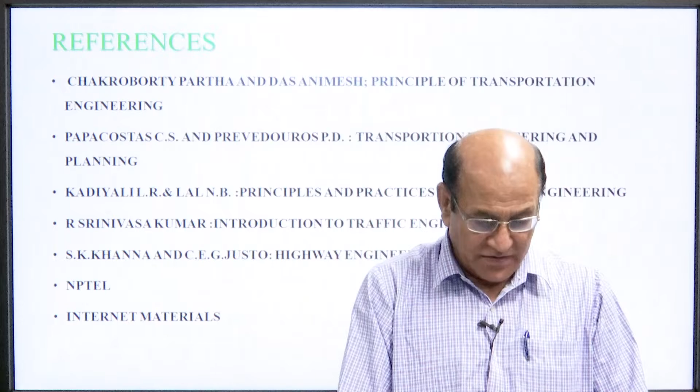References that we have taken: Chakroborty Partha and Das Animesh, Principles of Transportation Engineering; Papacostas C.S. and Prevedouros P.D., Transportation Engineering and Planning; Kadiyali and Lal, Principles and Practices of Highway Engineering; S.K. Khanna and C.E.G. Justo, Highway Engineering. Some material have been taken from NPTEL and some material have been taken from internet.

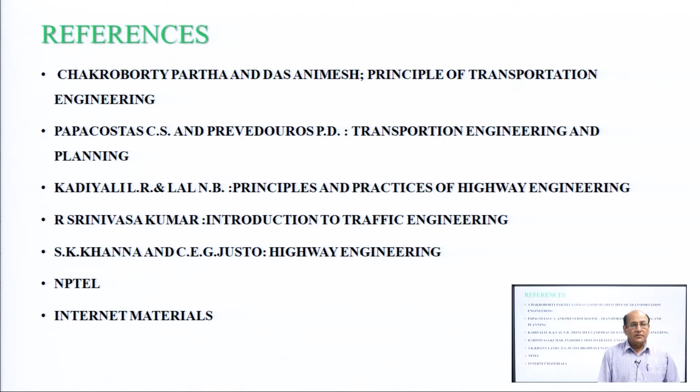The topic we will cover today is traffic survey, objective of traffic count, traffic volume count survey, intrusive sensors, pedestrian volume study, non-intrusive sensors or non-contact type sensors, and types of surveys.

Traffic survey allows for the collection of information and data regarding the use of road, traffic congestion related to roads, and other matters related to traffic. Traffic surveying is important and beneficial because it ensures the safety of motorists in general. Survey is also expedient in analyzing the flow of motorists in a certain area during a specific date and time.

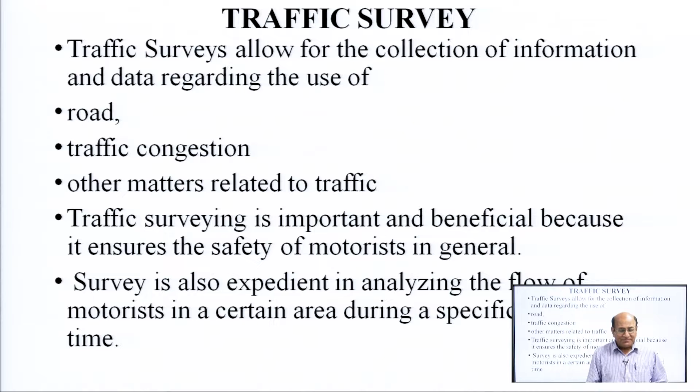Traffic surveys aim to capture data that accurately reflects the real world traffic situation in the area. It may include counting the number of vehicles using a road or collecting journey time information.

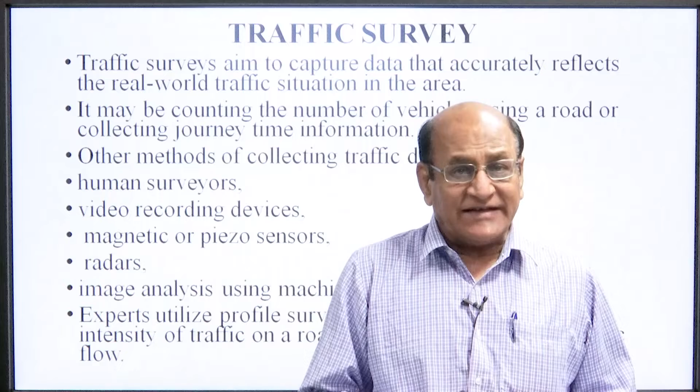Other methods of collecting traffic data include human surveyors, video recording devices, magnetic or piezo sensors, radars, and image analysis using machine vision devices.

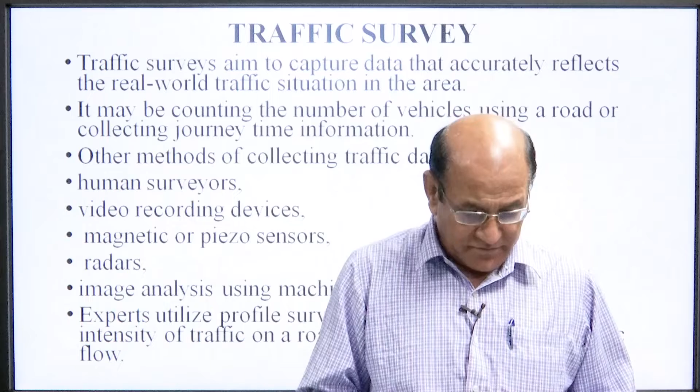Experts utilize traffic profile surveys to help determine the intensity of traffic on a roadway and direction of traffic flow.

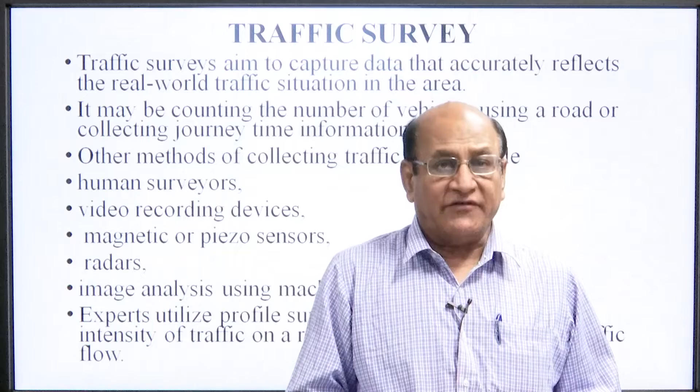Now, what is the objective of traffic count? The objectives of traffic counts are to ascertain the necessity of road widening, planning of new road network development, and to determine the general needs of structural and functional evaluation.

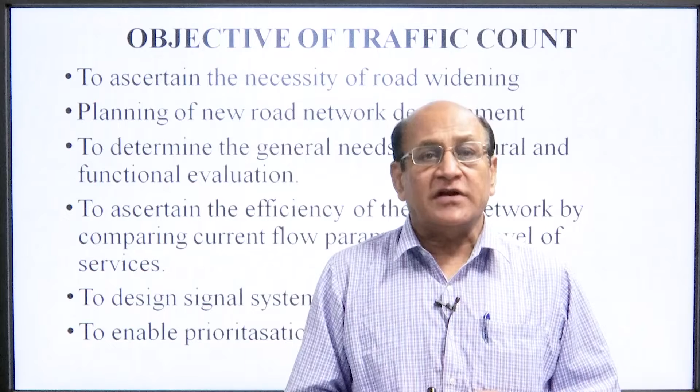To ascertain the efficiency of the road network by comparing current flow parameters with the level of service, to design signal systems, to enable prioritization of maintenance work.

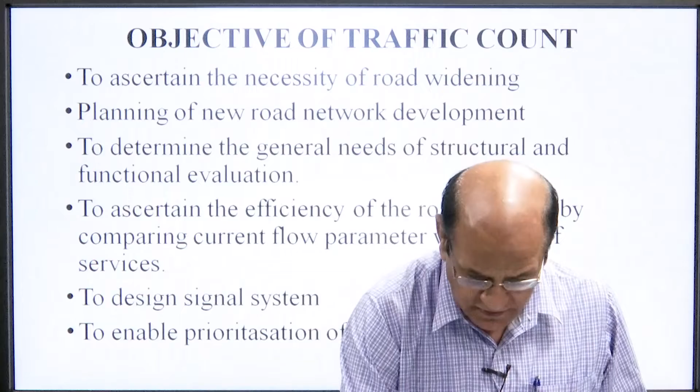To assess the economic benefit arising from road improvement, to estimate the need of parking facilities, to estimate the possible demand of traffic produced due to planning of new roads in a new town.

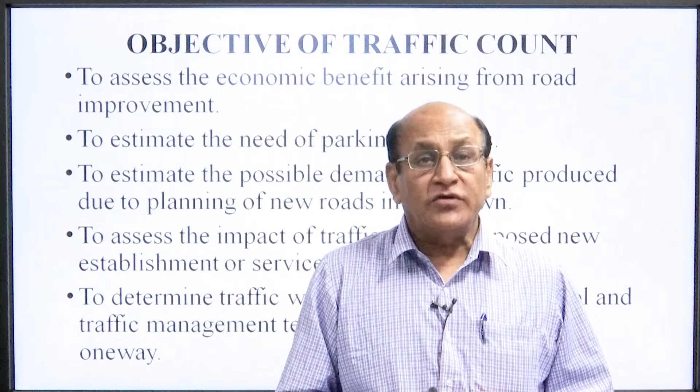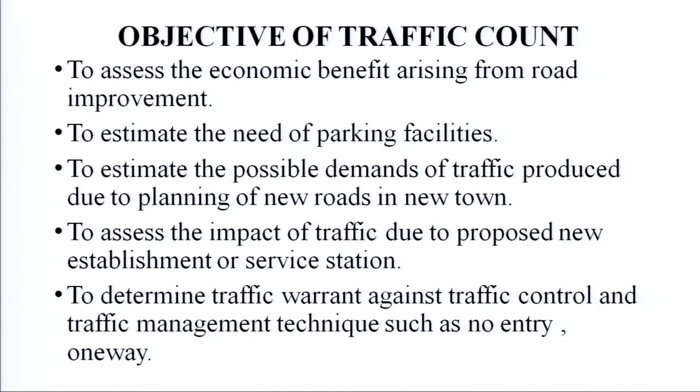To assess the impact of traffic due to proposed new establishments or service stations, to determine traffic warrants against the traffic control and traffic management techniques such as no entry, one way, etc.

To project the future traffic growth for given periods, to classify roads or road networks on their functional basis, to relate road accidents with traffic volume and predominant vehicles, to evaluate the performance of the pavement based on traffic volume, to establish the social and economic implications of the design infrastructure facilities.

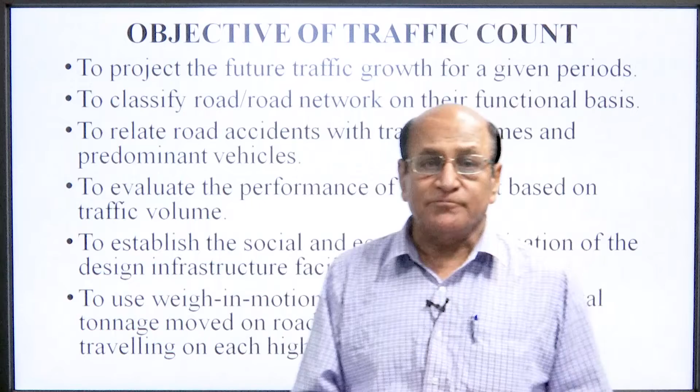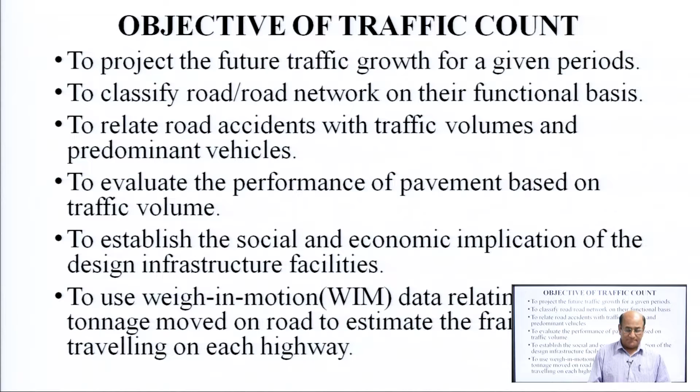To use weigh-in-motion (WIM) data relating to the total tonnage moved on the road, to estimate the freight traveling on each highway. So, these are the objectives.

Now, what are the different types of traffic survey? First and the most important is traffic count survey, sometimes called traffic volume count survey.

Origin and destination survey: travelers start their journey from one point, that is origin, and the end of the journey is the destination. Then intersection delay study, because at intersections vehicles have to stop and wait for signals before crossing, so there is a delay in the movement of traffic.

Traffic capacity study, travel time survey, trip generation data collection, household survey.

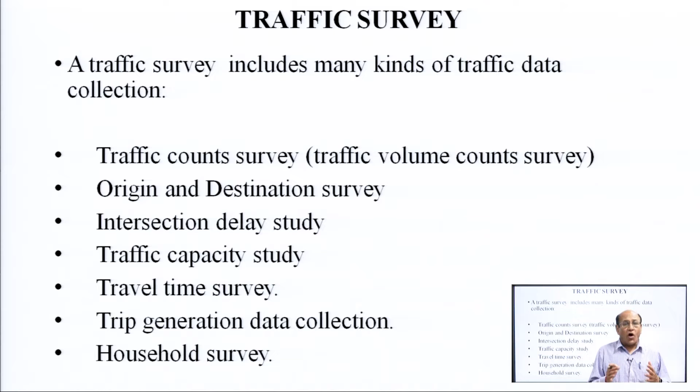Now, speed study: the first is spot speed study, meaning instantaneous speed. Then the second is speed and delay. The next is parking study, and the last is accident study.

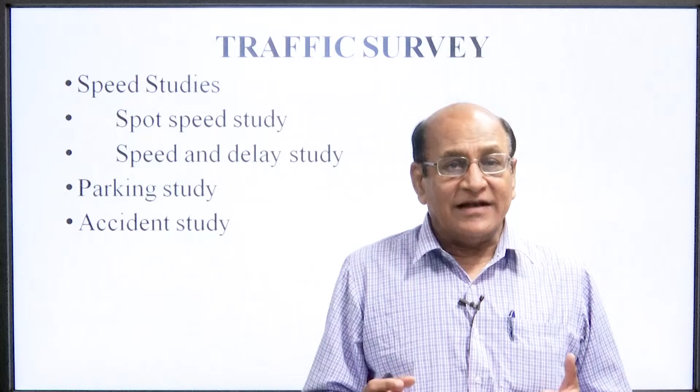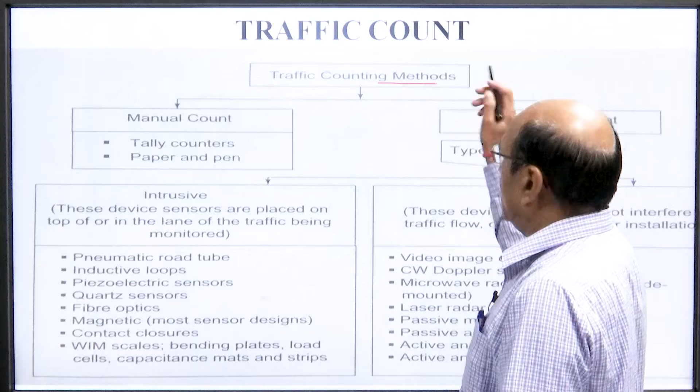Now we can see here the traffic count methods, the many methods. First is manual count and then automatic count. In manual count, tally counters are used, and paper and pens are required. The next is automatic count, which is a type of device used.

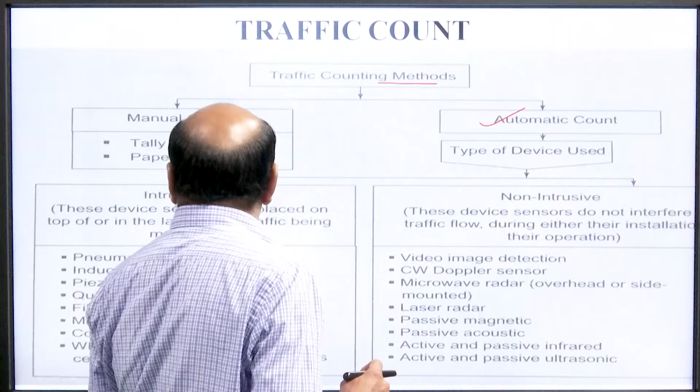There are many instruments used for automatic counting, the first being intrusive method and the other non-intrusive method. Intrusive method means in contact with the road, so these device sensors are placed on top of or in the lane of the traffic being monitored.

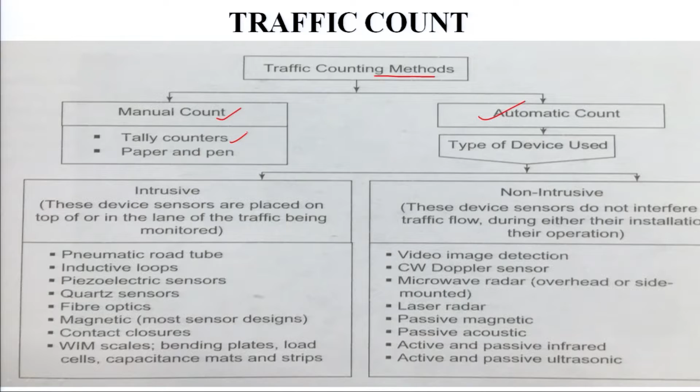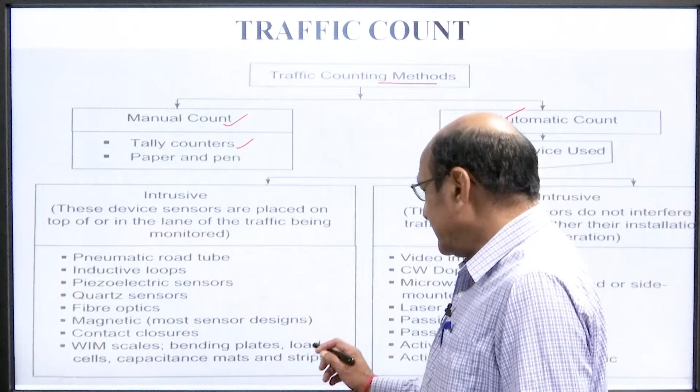There are many types used, such as pneumatic road tubes, inductive loops, piezoelectric sensors, quartz sensors, fibre optics and magnetic sensor designs, then contact closure, WIM scales, bending plates, load cells, capacitance mats and strips.

There are many types of intrusive type traffic counts.

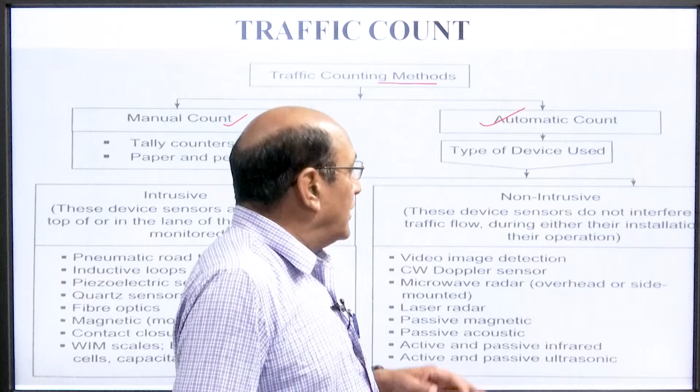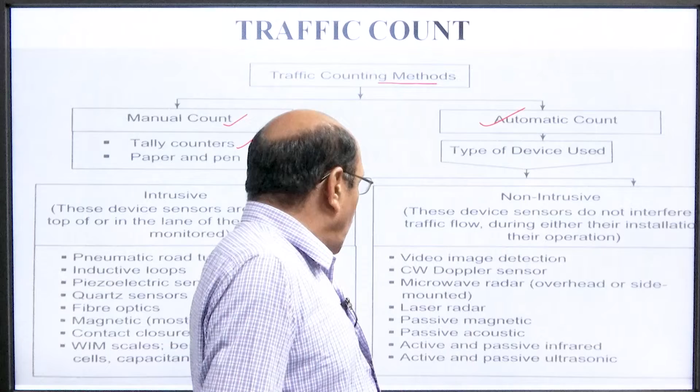The next is non-intrusive type, meaning these device sensors do not interfere with traffic flow during either their installation or operation. They include video image detection, CW Doppler sensor, microwave radar, laser radar, passive magnetic, passive acoustic, active and passive infrared, active and passive ultrasonic.

So, these are the different types of traffic counts.

Now come to the traffic volume count survey. There are two types. One is manual count: recording traffic volume by field team on prescribed sheets, in which vehicle classification and turning movement could be counted. 24 hours of a day is mandatory to count.

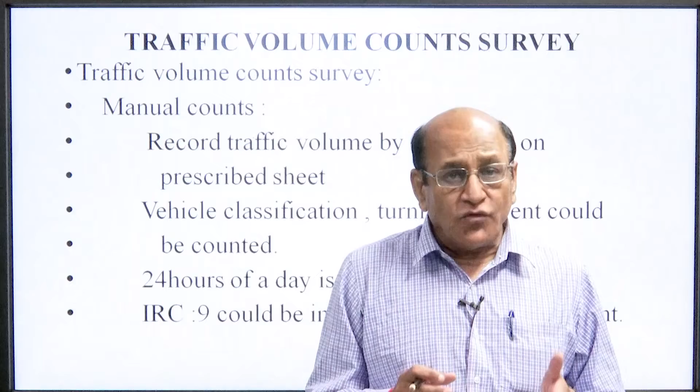As we know, IRC 9 has made provision of traffic census, so by this method, IRC 9 could be implemented by the manual counts.

Now, traffic volume count survey, come to the next part, that is the mechanical count. Mechanical counts are of two types: first is fixed type and second is portable type.

Fixed type is generally used at the toll plaza, near the toll plaza, so it is not required to move from one toll plaza to another, whereas the portable type of mechanical counts are used to count traffic at different places in a moving state.

So, the automatic detectors are designed to continuously record the traffic flow by vehicle class for discrete time periods like hourly, weekly, monthly, yearly, etc.

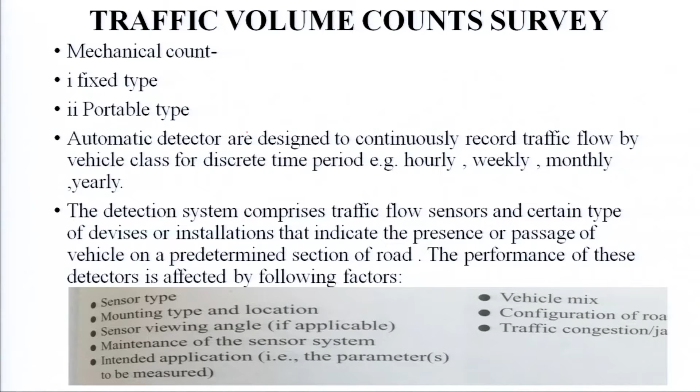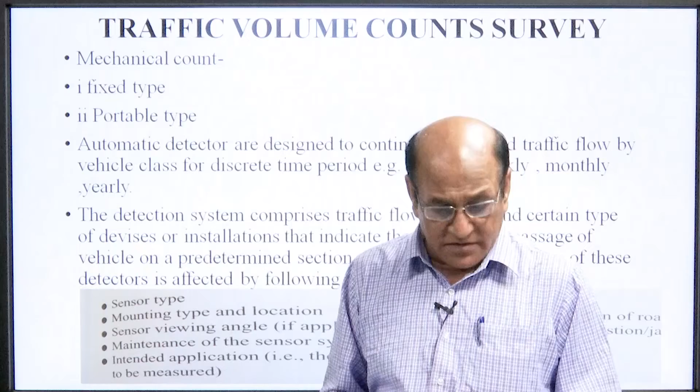The detection system comprises a traffic flow sensor and a certain type of device or installation that indicates the presence or passage of the vehicle on a predetermined section of the road.

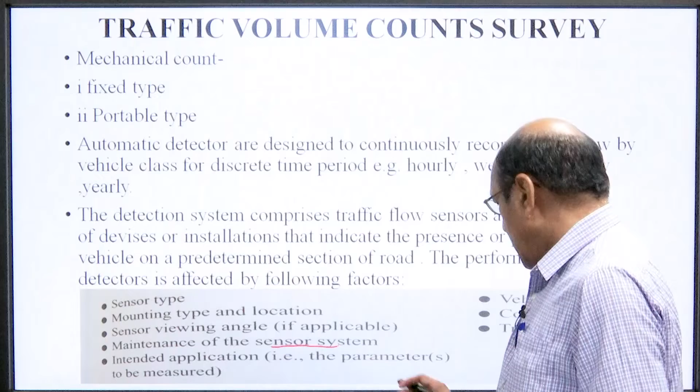The performance of these detectors is affected by several factors: sensor type, mounting type and location, sensor viewing angle, maintenance of the sensor system, intended application and the parameters to be measured, the vehicle mix, configuration of the road, and traffic congestion.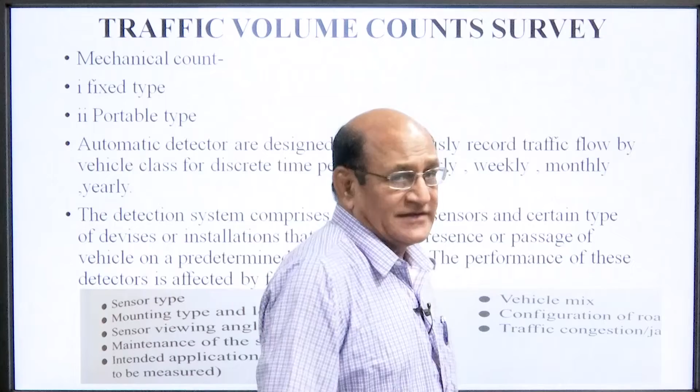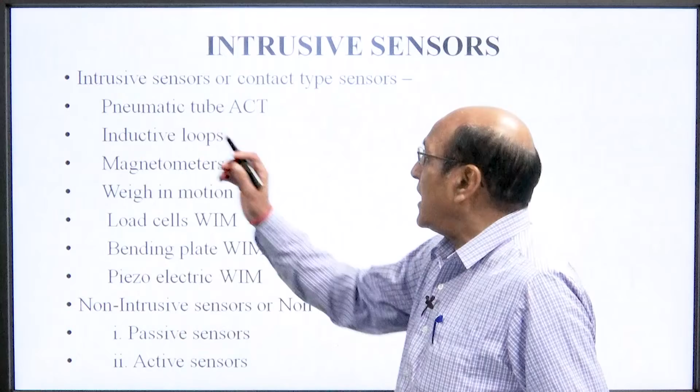So these are considered. Now come to the intrusive sensors. Intrusive sensors are the contact type sensors, and as we see here, that includes pneumatic tube ACT, inductive loops, magnetometer, weigh in motion, load cells, WIM, bending plate WIM, and piezoelectric WIM. So these are the intrusive sensors or contact type sensors used.

Briefly, in pneumatic tube sensors there are two parallel pneumatic pipes placed and connected to each other, and the impulse of the vehicle will be counted. In inductive loops, there are single loops or multi loops. When the vehicle passes over it, then that could be counted.

Way magnetometer means first a flux gate magnetometer or induction magnetometer. When a vehicle crosses these lines, there will be a variation in induction of the current, and which could be counted.

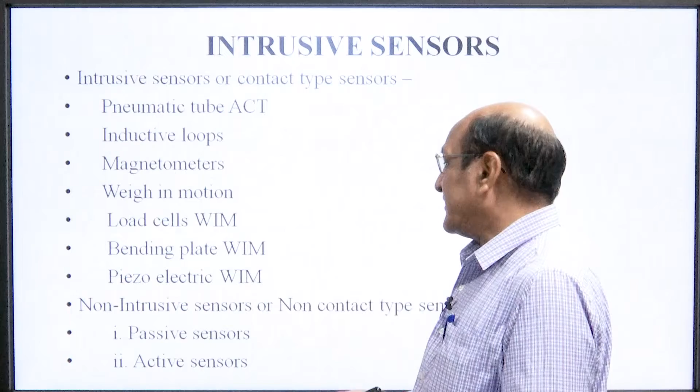Load cell WIM, as discussed in weigh in motion, means the load cells are connected at a central place where it could be counted. Bending plate is a bending plate by which we can do weigh in motion. Piezoelectric sensors are all based on the same principle.

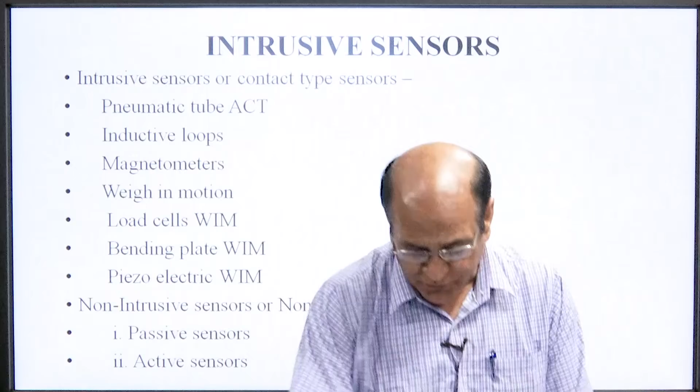Now, non-intrusive sensor or non-contact type sensor means there is no contact of the vehicle with the sensor. Here we have passive sensors and active sensors. Passive sensors include passive acoustic sensor, microwave radar detector, and passive infrared detectors. Active sensors include active infrared detectors, ultrasonic detector, video image processing based detectors, and detectors that use combined technology, meaning a combination of all the above we have discussed.

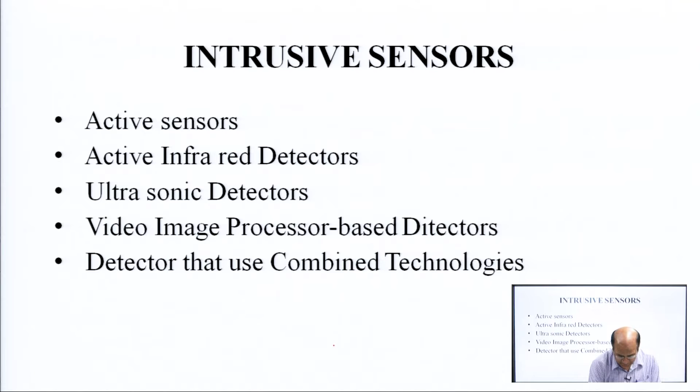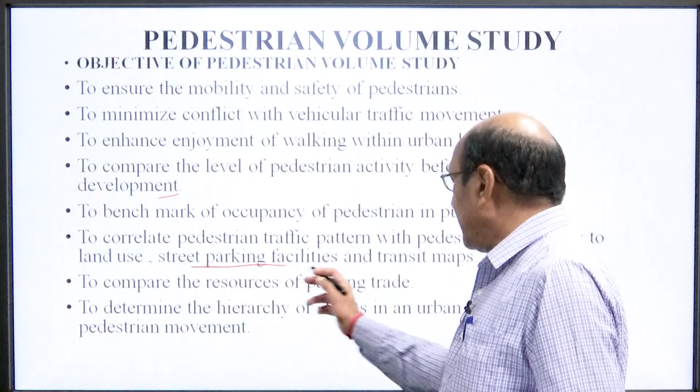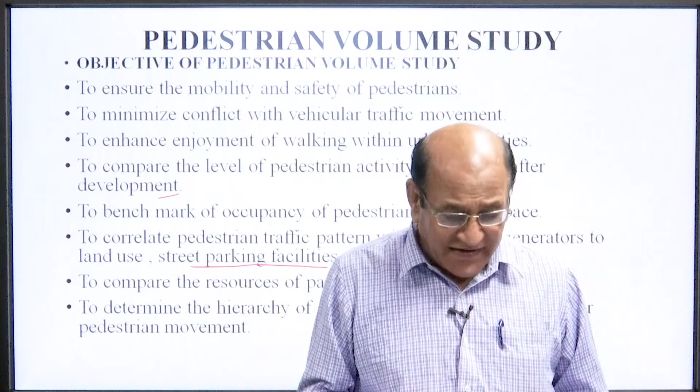Now come to the pedestrian volume study. The objectives of pedestrian volume study are to ensure the mobility and safety of pedestrians, to minimize conflict with vehicular traffic movement, to enhance enjoyment of walking within the urban locality, to compare the level of pedestrian activities before and after development, to benchmark occupancy of pedestrians in public space, to correlate pedestrian traffic patterns with pedestrian generators, land use, street parking facility and transit maps, to compare the resources of passing trade, and to determine the hierarchy of a street in an urban locality used for pedestrian movement.

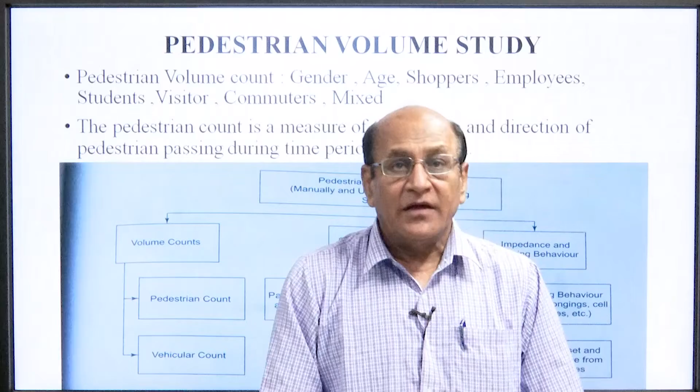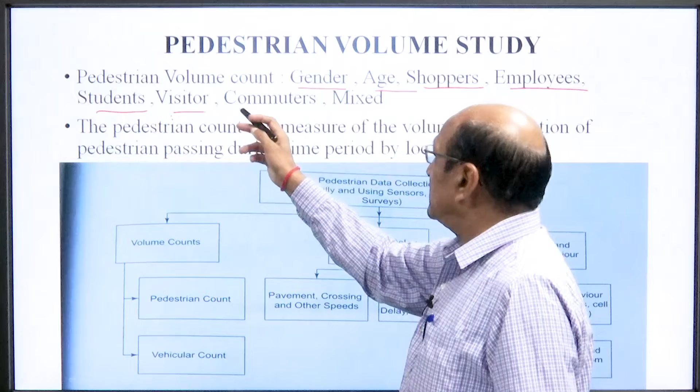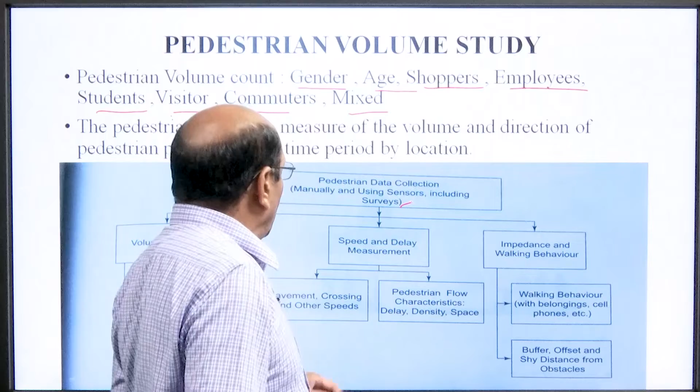Pedestrian volume study includes genders, age, shoppers, employees, students, visitors, commuters and a mix of all. The pedestrian count is a measure of volume and direction of pedestrians passing during a time period by location. Pedestrian data collection can be done manually or using sensors, including surveys. This has two or three types: volume counts, speed and delay measurement, and impedance and walking behavior.

What problems are faced during walking? In volume counts, there are pedestrian counts and vehicular counts both. In speed and delay measurement, pavement, crossing and other speeds are counted, whereas in pedestrian flow characteristics, delay, density and space are measured.

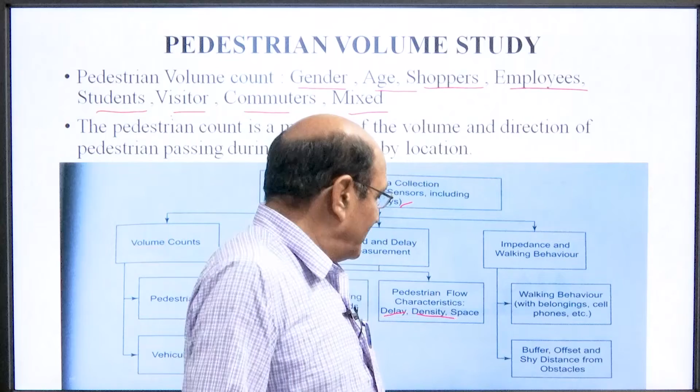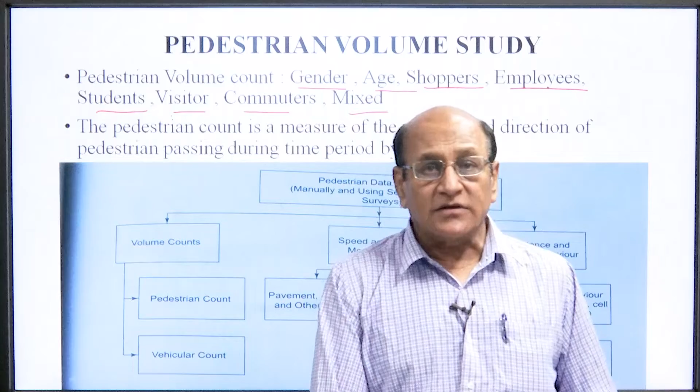Now come to impedance and walking behavior, which is most important for pedestrian behavior study. This includes walking behavior with belongings, cell phone etc., and second is the buffer, offset and shy distance from obstacles. So these are the ways by which pedestrian volume counts have been done.

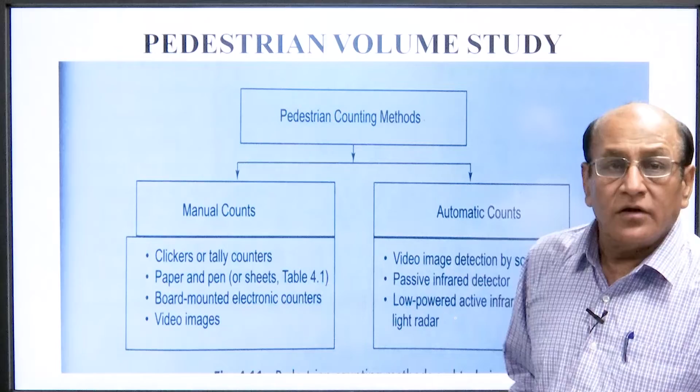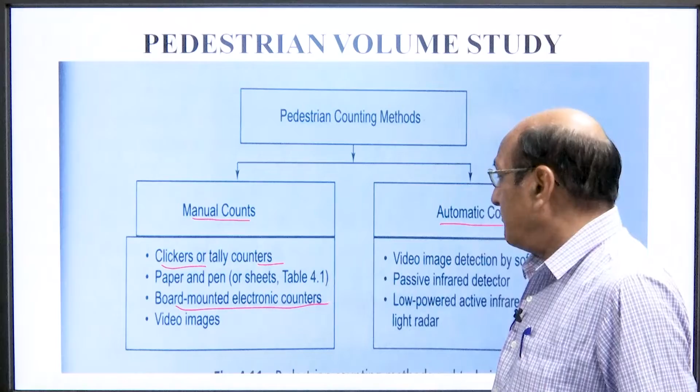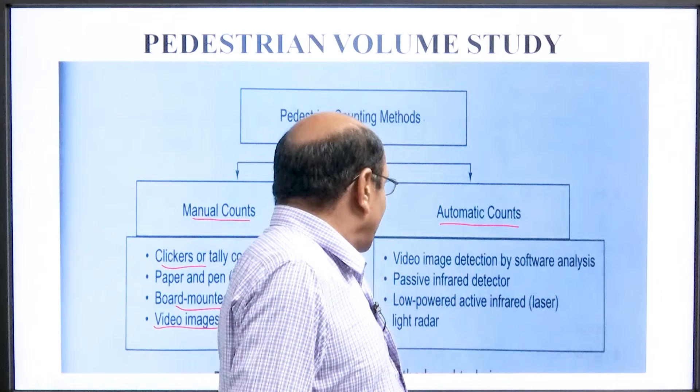We can see the pedestrian counting methods. First is manual count and second is automatic count. In manual count, that is the clicker or tally counters, meaning it can be done manually with paper and pens etc. Board mounted electronic counters could be used in manual counts, and video images are also used for manual counting. When images have been made, then they can be counted. Next is automatic counts: video image detection by software analysis, passive infrared detector, and low powered active infrared, that is laser, that is light radar.

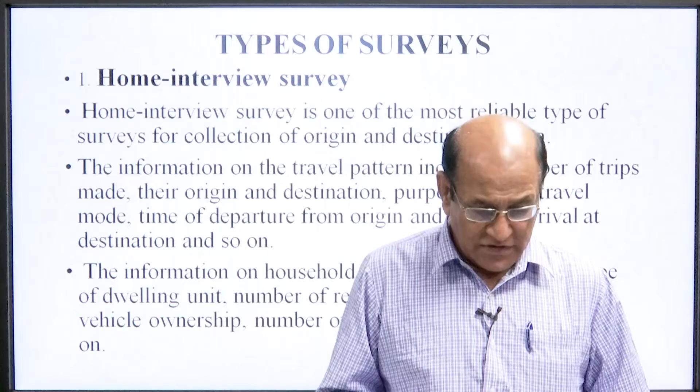The information on travel pattern includes the number of trips made, their origin and destination, purpose of the trip, travel mode, time of departure from the origin, time of arrival at the destination and so on. The information on household characteristics includes the type of dwelling unit, number of residents, age, gender, race, vehicle ownership, number of drivers, family income and so on.

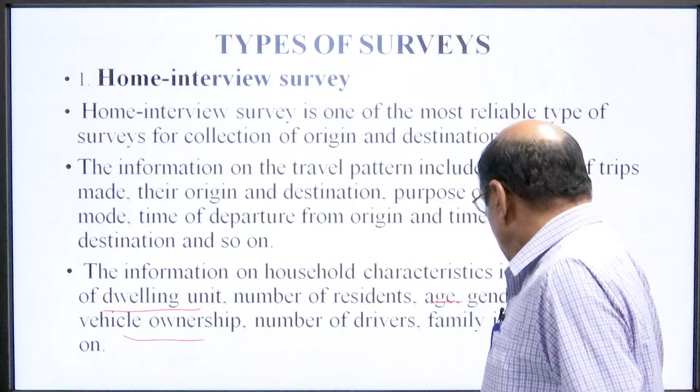So by the home interview method, we can collect all data required, and whatever problem arises can be resolved in the course of discussion.